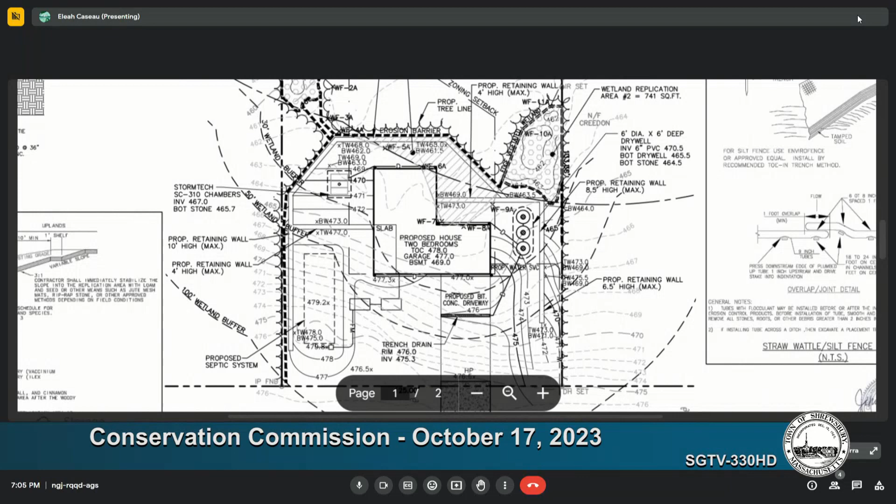Do we have a pointer? Do you have a laser pointer? No. There might be one on the remote? Perhaps. I don't think so. I'll just describe it by talking about, there's no north marked here, but it's easy enough to say that we're standing on Gulf Street, if we don't mind. I know Mr. Jakes one time on the Walnut Street project criticized me for using right and left, but it does work as long as everybody knows you're standing on the road facing in.

And so anyways, on the left-hand side of the lot, as we can see, that's the septic system, there's the holding tanks. In front of the house, there's the house 50-foot back, meeting the front yard setback.

And we will present this along with our alternative analysis, as we've done preliminary work on that alternative, but there is no other location, otherwise we do not—there is no Title V provision for new construction in lessening the setbacks from the house. So that they'll squeeze us in with the 20-foot setback if we push the house any further forward.

Mr. Grenier is saying that we would then violate the septic system setback, and also that in his 25 years, he has not seen a variance from front yard setback.

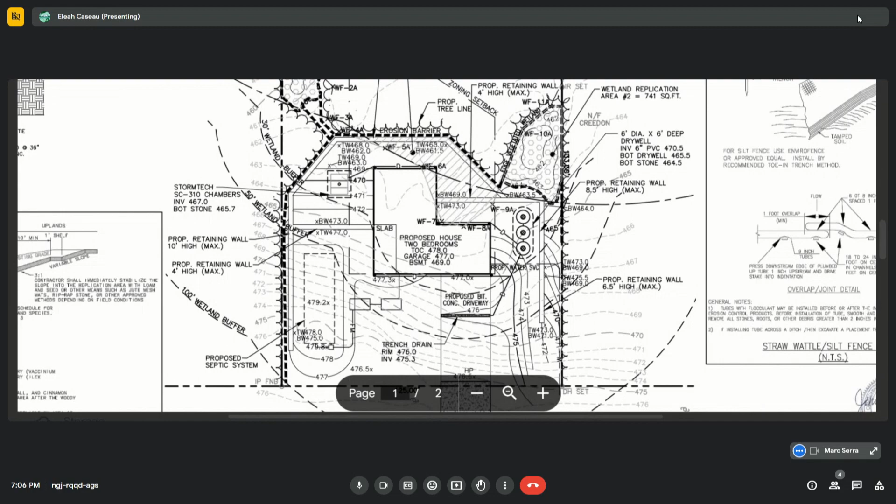That being said, all of this is going to be presented to the commission and to DEP, because in most recent times, anytime we have questions by DEP, we don't just submit them to the Conservation Commission, we submit them to DEP as well, in case, as what just occurred on one in Millbury, the commission closed the hearing and DEP didn't agree because they didn't see the revisions in time. So there was an appeal, but that's been worked out. So from now on, we submit everything to DEP and the commission.

And the main thing, I believe, is what the commission is after—proving 3 times, and we can show through minutes and through the permits we have, Westbrook in '96, and other things—in August '96 the riverfront regulation came into the regs. And we proved 3 times in order to put in 3 houses, and you do have a copy of this, but we're gonna blow it up and put it on a 2x3 so everybody can see it.

And the DEP, as we go down Mr. Turnblom's main driveway, there's a house to the right, that it's called Lot 1. It was permitted in '04, sold in '05.

We proved it was intermittent, the brook at that time. Then, on the back lot that Mr. Turnbloom owns, we permitted in '07, Lot 8, and proved that it was intermittent. I did the photos twice at the lowest point of the lot, 200 feet down gradient of this property, which would be south. And then one other time, we proved that it was intermittent. In '99, we did Lot 3, sold in '10, and proved then again that this was intermittent.

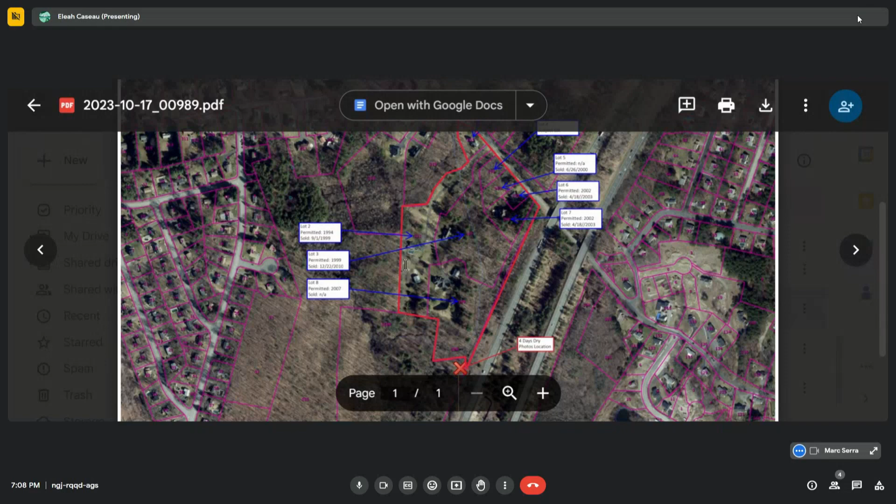So in the meantime, as proving it's intermittent, for 3 years the order is good, and the brook then would be determined to be intermittent, because once you prove it, it's shown on a plan that it's intermittent at that lowest point, which is where this stream stat was taken - that's what this X is on the stream. So then we sold off lots.

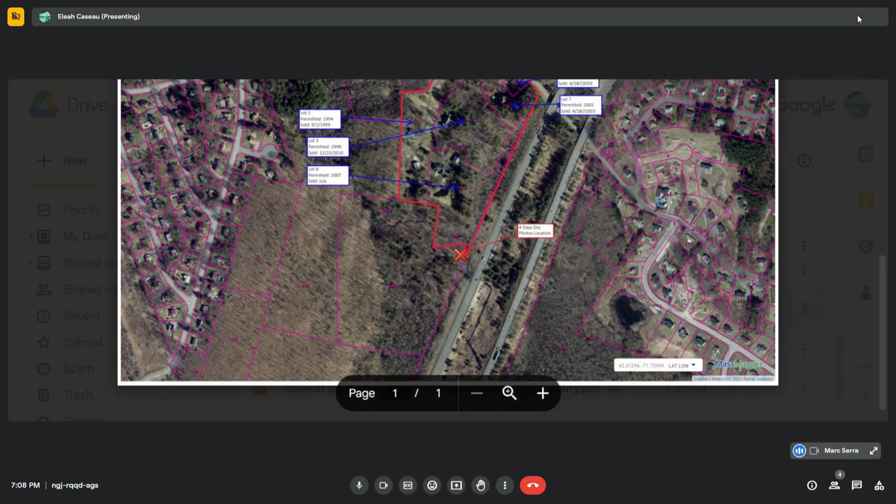Also during this period, because we did not see the need, or Mr. Turnbloom did want to sell them, we built on them, we sold them, and we have one lot left, but it was sold during a period when this brook was determined to be intermittent.

The argument now is, well, you have to use those lots that you sold off in the alternative analysis. Well, if they were proven that they were intermittent, well then we wouldn't use them in the alternative analysis. If we sold off lots when the brook was proven 3 times that it was intermittent, we wouldn't need to hold on to the lot because the brook was intermittent.

This will be discussed more in detail with DEP, as we see it as a problem with the way the language is in the wetland regulation, and if it has to go to an ALJ, it will - that you can't be held at fault for selling off property, maybe not thought of back in '96 when it was finally approved, the riverfront regulation, but how can you be held at fault for selling off property when the brook is not perennial?

So, if that case is won, we have only one other lot that we don't own out of all this development. And if the DEP had, if there was a case that DEP did not agree, they would say, well, you should have kept that lot that you sold while it was intermittent, and that would be an alternative lot.

This will be in detailed language, and we would hope, as in the last one we presented, that the whole report is read by everybody on the board.

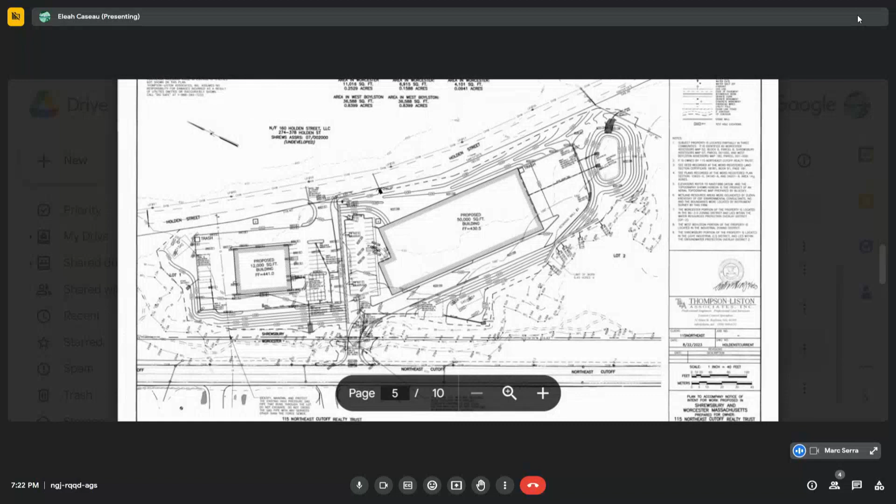So we're looking at a parcel of land approximately 14 acres in area, located between Holden Street and the northeast cutoff, the northwest corner of the town. The property has land in Worcester, West Boylston, and Shrewsbury, and we've proposed some work in Shrewsbury, which is before you this evening. There are a number of culverts on Holden Street that discharge runoff onto the subject property. That collects at the low end, or the westerly side of the property, and then flows in a southerly direction. There are some wetland resources on the property, including primarily bank, defining the flow path for that water. Although the soil's very sandy, there's no wetland soil present in those areas, just a path for water to flow in a southerly direction.

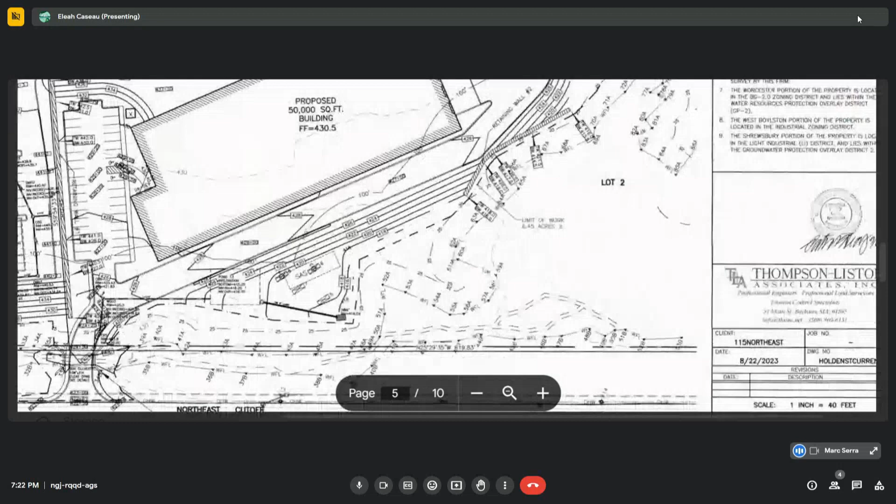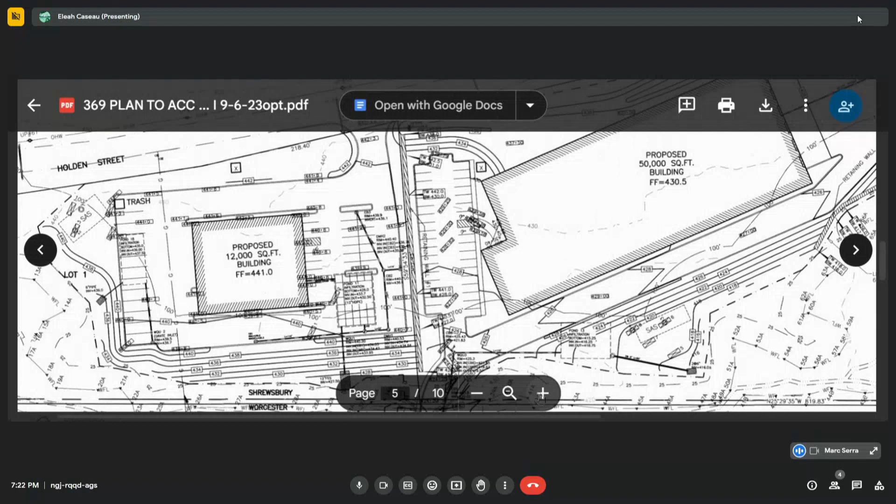When you get to the southern end of the property, there is in fact some bordering vegetated wetland just off the screen to the right there. So what we're proposing is 2 lots, a 12,000 square foot building and a 50,000 square foot building. The 12,000 square foot building will be accessed from Holden Street. Essentially the entire lot will have to be filled in order to meet the grades on that side of the site. That does allow us the opportunity to put an underground infiltration system, or 2 actually, one for the roof runoff and one for the parking lot runoff on that side of the property. Each of those has a discharge, an overflow discharge pipe that goes out to the water course on the west side. So on this plan that's on the screen, north is to the left, still oriented.

You can see the separate boundary. So on the second building, the 50,000 square foot building, because it's a large footprint, we're trying to work with the grade to place that building.

So essentially, we want to have the building on natural grade as much as possible, which lowers our access point. To get to this lot, we'll be proposing an access driveway off of Northeast Cutoff through the Worcester right-of-way and an intermittent stream crossing with a culvert in Worcester. That project has been filed with the Worcester Conservation Commission.

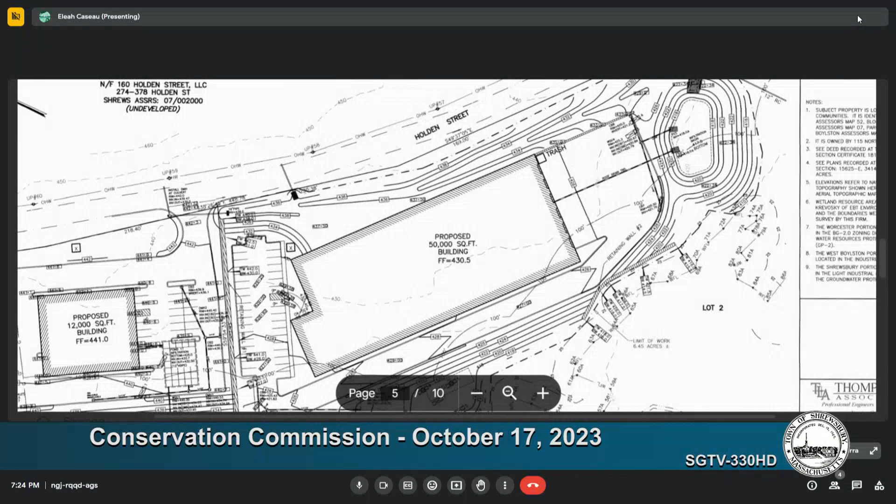I have a public hearing coming up with them next week. So if we continue on the 50,000 square foot building, to the south or the right of the screen, you see a large infiltration basin, which primarily handles the roof runoff from this large building and the paved area on that end of the building, which would have loading docks.

So this is designed as an infiltration basin. As I said, the soil on site is very highly permeable sand. We have done some test pits out there, although as Aaliyah pointed out, they're not exactly in the detention basin or the retention basin, so we will have to do some additional testing to confirm. What we know to be the case is that relatively deep groundwater and highly permeable sand in this particular area is well served to provide infiltration for such a large impervious area. It's not always the case where we're trying to infiltrate a small amount and detain the rest of the runoff. In this area, we're able to infiltrate up to 6 inches of runoff before seeing overflow discharge to the wetlands.

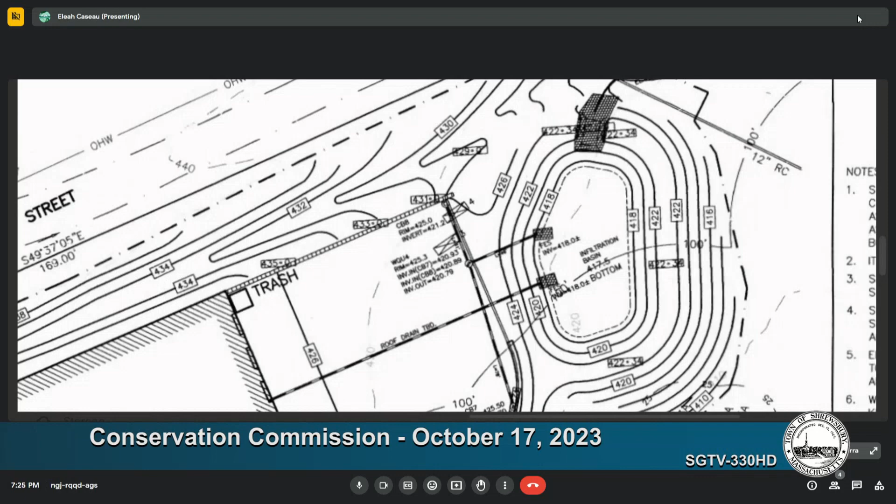So we have developed an erosion and sediment control plan and a sequence of work. It's the next plan in the set after the grading and drainage, showing perimeter controls. And in the scope of work, in the notice of intent, we're describing the sequence of work, which includes clearing, grubbing, establishing some temporary settling basins if they're necessary. It's not likely that they will be, other than if we're creating soil stockpiles.

And then the timing for the project, of course, time is of the essence for the property owner. They expect to construct the 12,000 square foot building first, since they have a tenant waiting for that space. And then the 50,000 square foot building does not have a tenant yet, so that construction would lag after the first lot construction.

If there are any questions, I'd be happy to take them. I know you do have some comments from DEP, and Aaliyah provided me with a comment letter last week while I was away, so I haven't had the opportunity to address those at this point.

Okay. Diane? Yes. Okay. Bear with me as I think while I'm speaking, okay? First, can I ask what kind of businesses these are meant to be?

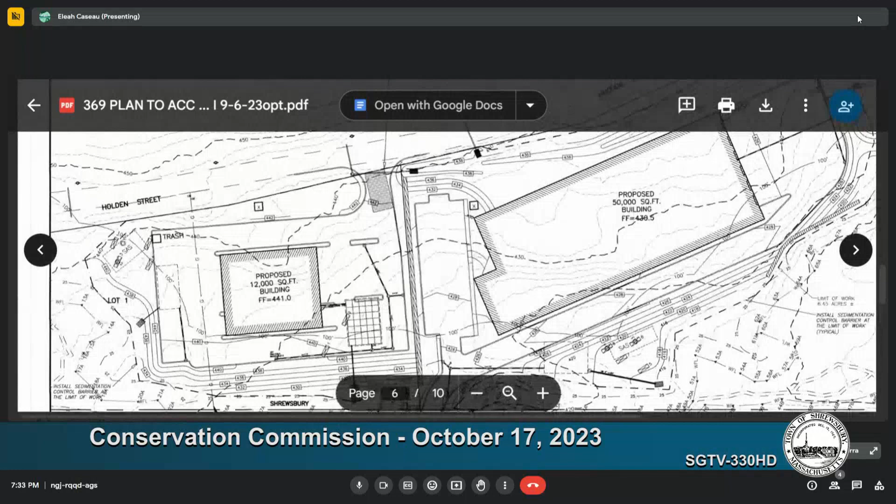There's probably a 15-foot difference between the two streets there, between Holden Street and Northeast Cutoff. And Northeast Cutoff is continuing to slope down to the south. So it's very difficult to create a flat site if you have to meet that higher grade. So it works out best to come in at the low elevation.

This is very close to the driveway we recently created for the Worcester school bus parking. You can see the driveway curb cut there, to sort of put it in perspective where it falls.

And I would like to point out that that part of Northeast Cutoff was actually graded out for a 4-lane road, although only half of the road was built in the 1960s. So that is all imported fill material that's been graded. There's a drainage system already in there. So what we're left with is right at the edge of that fill, there's a flow path that goes down the whole side of that roadway, and that's where that culvert crossing would be located.

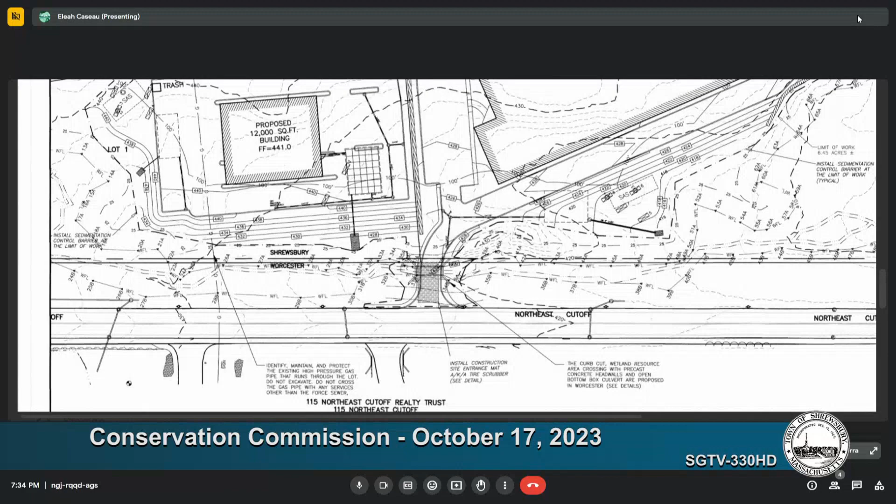Andrew, we've met with the applicants on the project. A couple of issues, not really wetlands related - obviously there's no sewer there, but there also is no water. You're showing a water connection, but we don't have an intermunicipal agreement with Worcester for water. I think we made that clear.

So we have been in discussions with the Worcester Public Works Department. They do have a separate fee structure for service to properties that abut roads in Worcester that are not actually served in Worcester, so we're hoping to apply under that provision of out-of-district service. That's our understanding talking to them, but again, it's not relevant to the wetlands.

So is it your understanding, Mr. Truman, that somehow Shrewsbury does not have an intermunicipal agreement with Worcester, so we can't allow it? We've already talked to them about it, so we'll have further discussions. So it'll have to be a well - but then if we get into a well, this is also in our Zone II for one of our town wells, so we have to be careful. So that's an issue that will be held.

I think we've got a way to go, because obviously we have been coordinating with Worcester Concom so we are not conflicting with each other.

Mr. Chair, I should point out both of these buildings are being served by private septic systems. We've done the soil testing. We have not submitted the septic systems to the Board of Health at this point for approval, but there is sufficient area and suitable soil conditions to allow that to go forward.

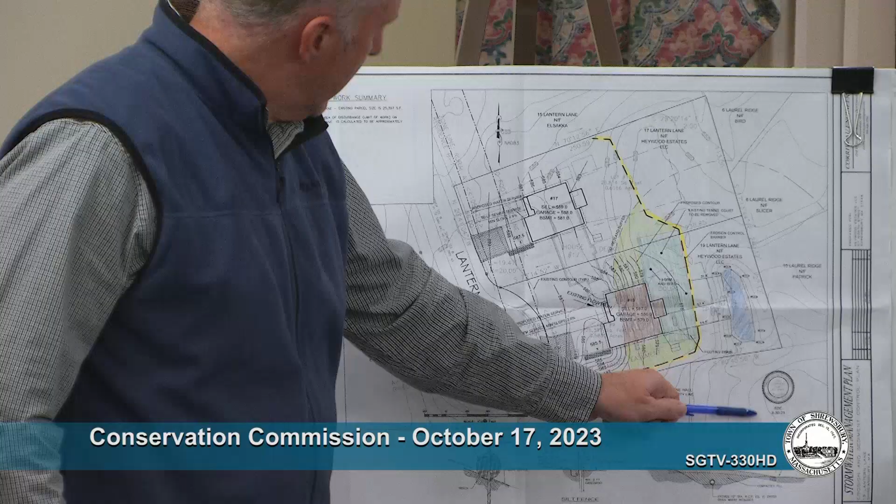Wetland resource areas consist of an area of bordering vegetated wetland, which flows through a culvert and drains to the south. So we've got a 100-foot buffer zone here, which currently incorporates the existing tennis court and an area of lawn.

Proposing to subdivide this into 2 lots, remove the existing house. Lot number 17 will be completely outside the 100-foot buffer zone, with the minor exception that some work will be occurring to remove a portion of the tennis court and loam and seed that area. That's an exempt activity under the Wetlands Protection Act, but we've included that in this application package.

There'll be a proposed single-family house on number 19 with the rear portion within the 100-foot buffer zone. Also included is some grading. They'll also remove that existing tennis court, loam and seed, and make that into the rear yard.

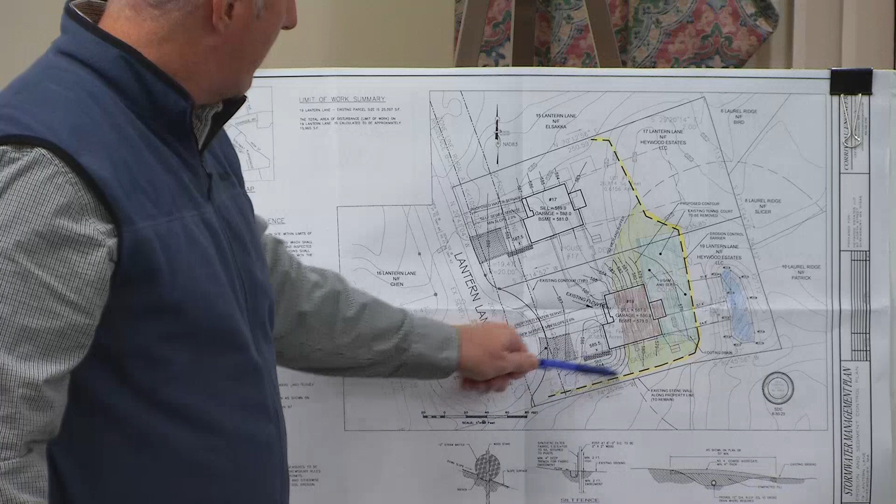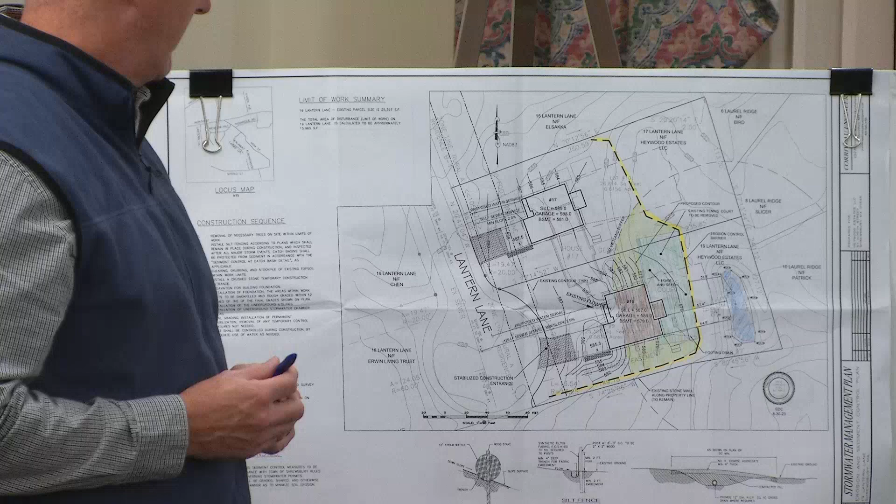For erosion controls, the proposed hay bales and straw wattles wrapping around the rear of the property to protect the resource area. Also proposing construction entrances at the roadway. There's some stormwater features consisting of trench drains along the driveway and roof infiltration from the proposed roof of the single-family homes. That pretty much summarizes the project.

I'd be happy to answer any questions that the commission may have. Diane: I don't have any questions. Martha: I'm all set. Jason: I'm all set. Chris: No questions.

Scott, you're showing the erosion control barrier? Yes. What's on the other side towards the wetlands? Is that wooded? Is it grass? What is that?

There's a wooded fringe as it comes down towards the wetland here. I believe in this area there's lawn back in through here a little bit. It's kind of wooded, there's some granite steps that go down from the back of the existing building into that area. But where the wetland is, where the tennis court ends, there's a fence line, and then it's kind of the top of slope, and then when they graded out for the tennis court, that all just grew in since.

So you're going to limit your work within the confines of the hay bales, not go outside of that? Correct, just outside that tennis court, they'll remove any fencing and leave everything on the inside of that. To give you dimensions, we've got 31.8 feet to where the tennis court is, so there'll be 30 feet of buffer zone through here. And the house is 64.8 feet off that wetland in this corner, and the deck 57.4.

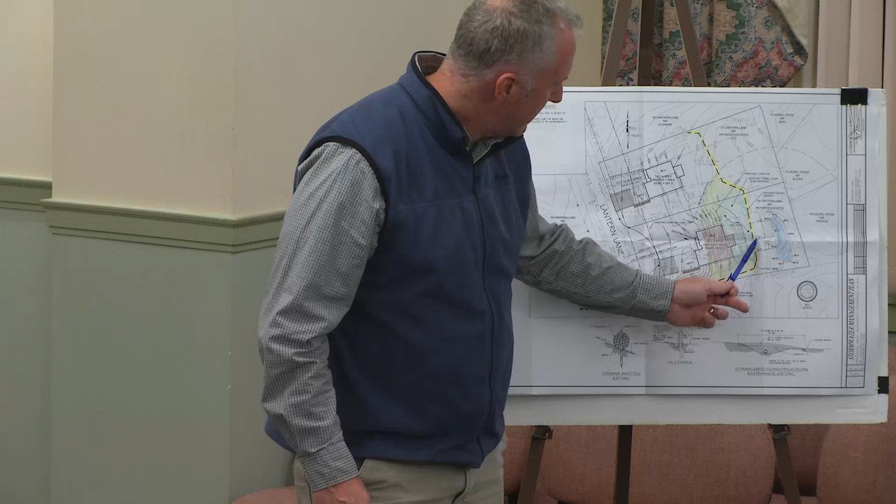One other question, I'm sure all your downspouts and everything are going into a recharge system in both houses? Okay, Andy, just a couple of things.

You haven't filed for the stormwater permit yet? Not yet, no. And then you haven't ANR'd the lots either? I couldn't find it. In terms of the lots, they're the same as they were in a 1970-something subdivision. Essentially, they built the house on 2 lots. A couple doctors bought both lots and built one house, so no new property lines are proposed, same 2 lots as they were originally created.

Okay, good. I'm just looking at GIS because we just have it listed as 17, we don't have a 19. So we just need to check with the assessors, that's all. Yeah, because otherwise the order's going to be locked to both parcels if you don't have separate deeds.

I think that's probably okay though, just because there's that little bit of work on number 17 with the tennis court. So whatever you guys think, it seems like you probably have it on the entire parcel, right? Both lots? Yeah, it's on the entire parcel. Keep in mind that 17's work is exempt, so when it comes time, I'm sure the commission would issue partial certificates if you had to in the future as you're selling off those house lots, or just one certificate of compliance when you finish the entire project.

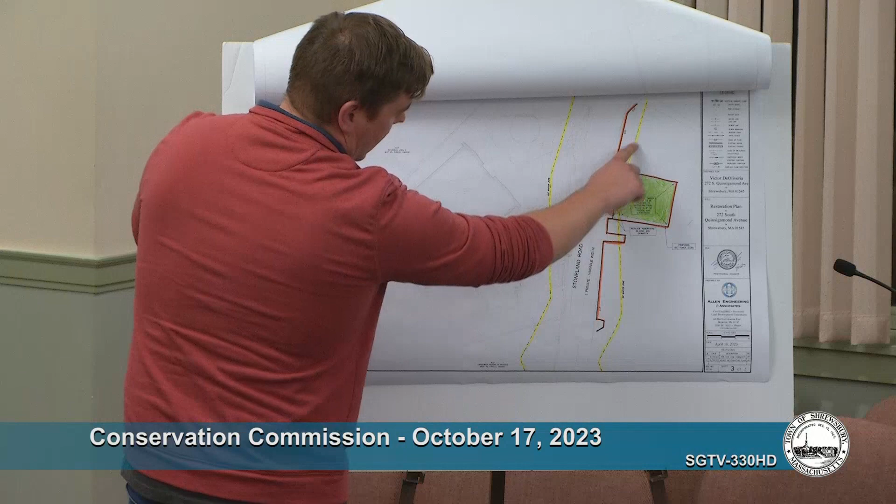And then there's a row of arborvitaes that run across here. We would just close it back up with some more arborvitaes, bring it back to exactly how it looked before. Currently, he has set up the erosion control completely around it, that's here in orange. And once this restoration is complete, he would put another row of silt fence to kind of block off the area while that grass grows. And then he would then be able to start his proposed project, which he was approved for.

That's not all I have for you. I have a question. Why did you do that when you knew you had an order to do some work there? You knew there were wetlands there, you knew the issue with the house across the river, the brook. It was definitely a mistake, and I apologize.

I thought we had approval for a curb cut. The idea was that I own a boat, and if I wanted to use it for storage, just to put the trailer there, all I did was have the grass removed, got down to the soil, and put some gravel. It wasn't paved, it was just gravel. So I foolishly thought it was no different than landscaping.

It would just be easier to maintain, not to have grass around the boat trailer, easier to have gravel underneath it. That was the mistake. Aside from that, my wife wasn't too happy with the way it looked, so I think it was going to come out anyway and be restored, regardless of this issue.

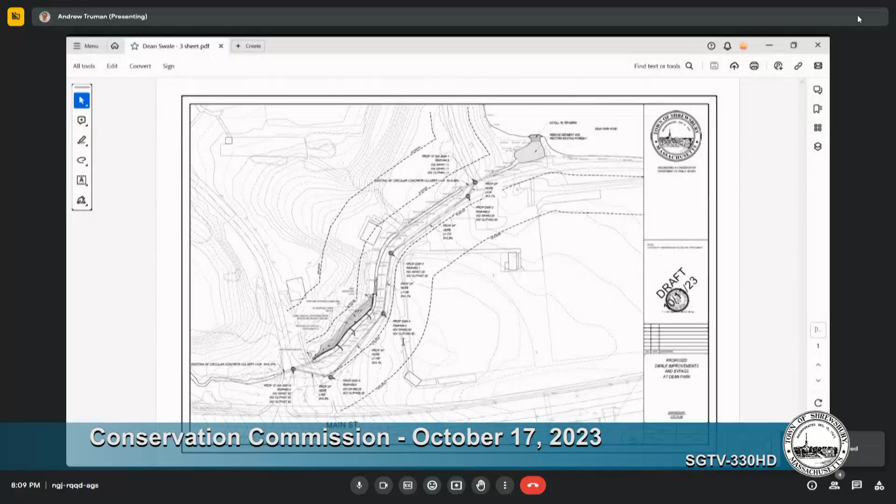Some of you know, this is the existing driveway that goes down into Dean Park. This is Main Street here, this is the access driveway, and this is that swale that runs down the side.

Some of you may remember we got our wrist slapped by the Army Corps a few years ago for trying to do some slope stabilization in there. But one of the issues we've had is over the years that swale has started to fill in. When we get those big flash storms, it's basically filling up the swale, overtopping the road and actually washing out the parking lot.

So we put a berm in, hoping that would resolve the issue, but it's still overtopping when we get those bigger storms. So what we're looking to do is put in a drainage bypass that will take off some of the pressure when we get those bigger storms.

So we'll basically drop a manhole on the existing culvert in the driveway and then run down the driveway and tie back into it. Let me zoom in a little bit.

And then this drains into what we've always thought of as a stormwater forebay. We can't find any records on it, but it's built like a forebay, and it's got sediment in it. So as part of the work, we'd like to go in there - we went out there today, and it's got about 12 inches of silt in the bottom of it. So we would like to turn it into a proper, formal forebay, clean it out, and put in a filter berm across it so we get some more pre-treatment in the drain.

So it's technically all exempt under stormwater drainage, but I just wanted to make the commission aware of it, that we're gonna probably put this out to bid next year and hopefully get this done.

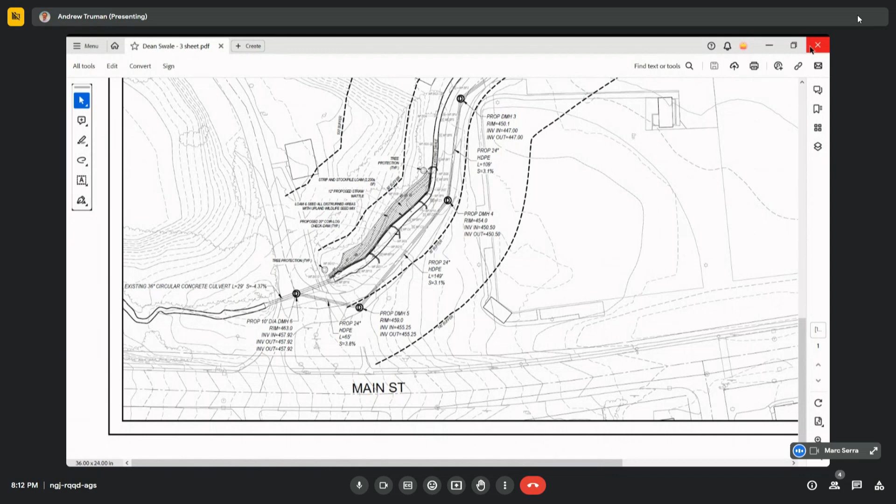When is construction proposed? Well, we're going out to bid probably - I don't know, there's no off-season per se. We'll have to talk to Parks and Rec and see when's the best time to do it, like Maple Ave Park, which in January is pretty...

Well, there's no frozen ground issue - it's not in the street, so we could do it in January, but we don't really want to be digging in the frost. We'll figure it out next year, but it's gonna be an inconvenience for a short time, and we think hopefully it will stop that and protect that swale from overtopping, which is becoming more and more of an issue.

That's it - it's for the baseball players, it's a problem for them. It is actually, because they spend a lot of money to fix that field, and it's just an inconvenience because it washes out the whole road, and eventually it's gonna wash the road out too. So since we can't go in and do anything to the swale itself, we figured we'd try to take the pressure off upstream and bypass it when we get those big storms.

Yes, because there is more precipitation. We are getting those 100-year storms more often than every 100 years, more like every 37 years on average, and rainfall intensity since I was born has increased by 55% during heavy storms.

So that's what this is. Yeah, when I first started, it maybe happened once a year. Now it's happening 3 or 4 times a year.

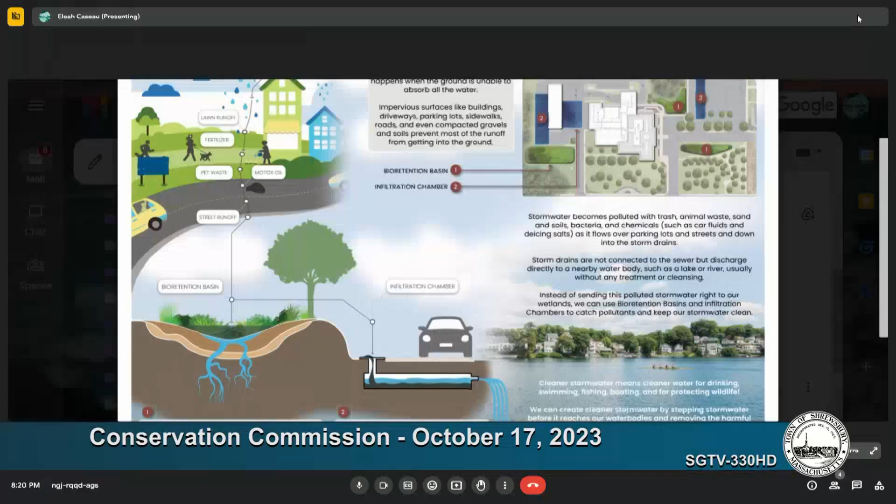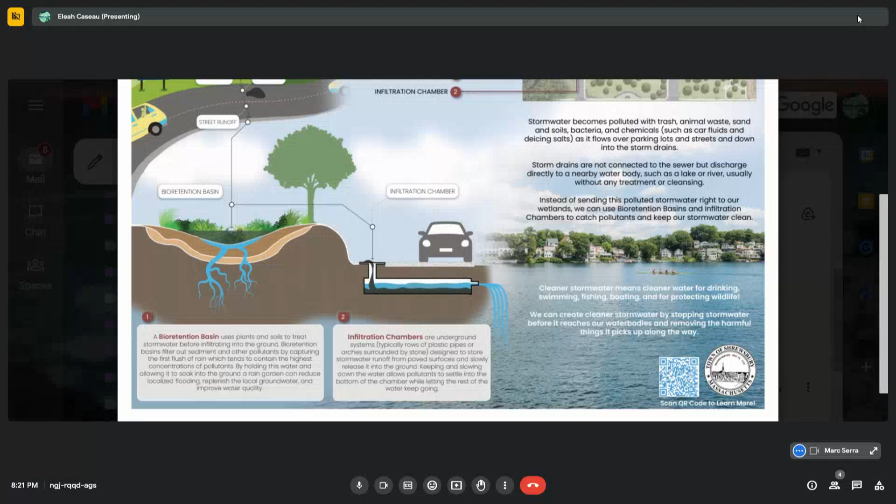So this is basically the information boards that are gonna be going up. They could probably answer the questions better than I could when they come in next month. They were supposed to come in tonight but weren't ready, so we'll give an update now and they'll come in next month with the LA, the GC, and the project architect, possibly remotely since they're fairly distant, but I assume we can make that work.

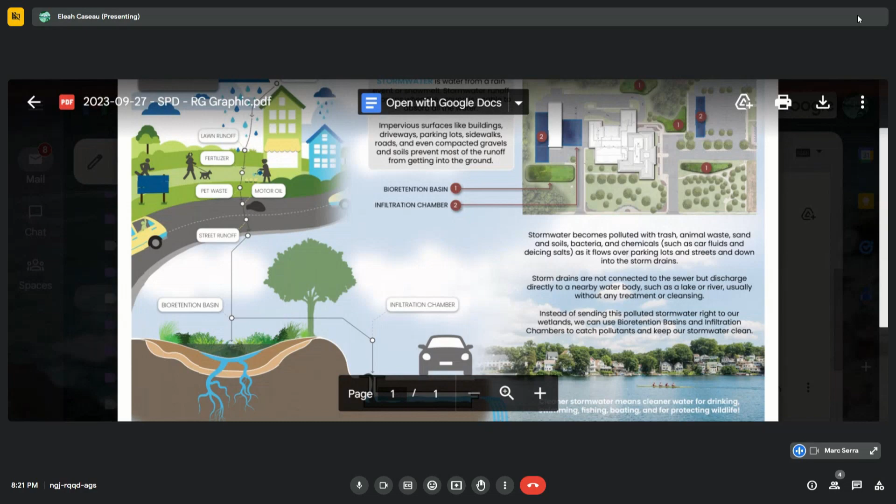We spent a couple months making some of our stormwater literature a little more accessible to a variety of ages and audiences, detailing what the two kinds of infiltration units on site are: the infiltration chamber and the bioretention basin, what they are and how they work, with a little map showing where they are on site.

Very good, that's gonna be great.

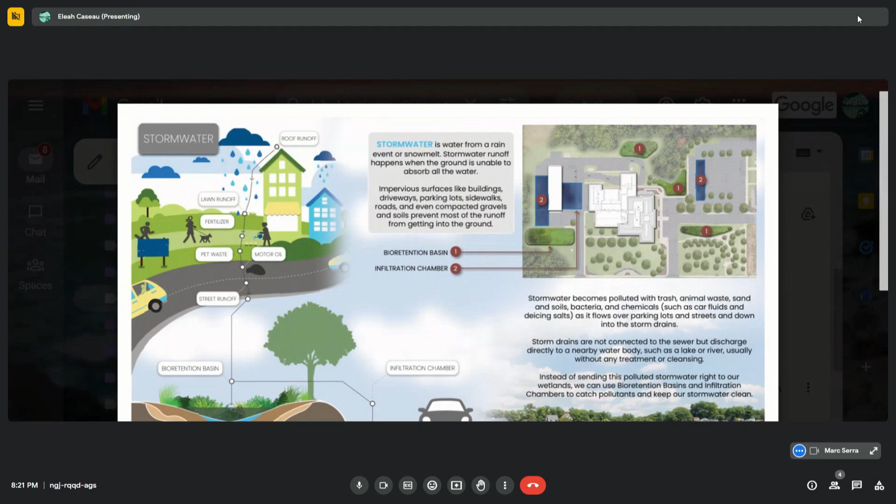So we need a nice basin to put next to it. Yes, you do. We don't want to be staring at Phragmites while they're reading the board.